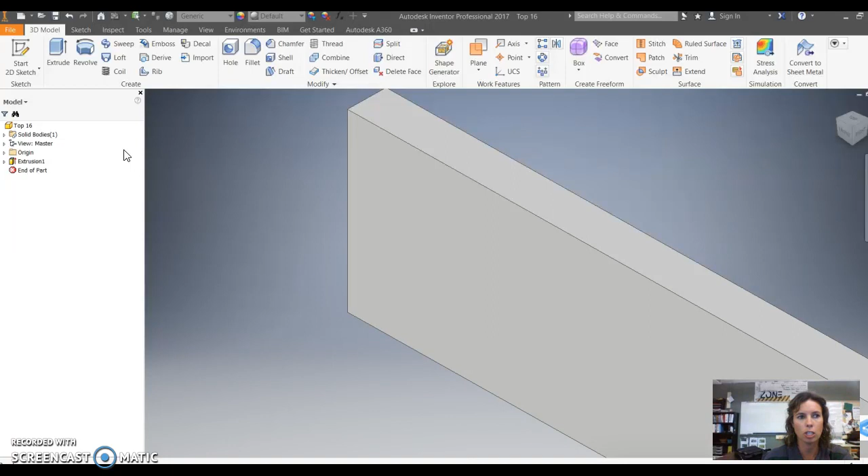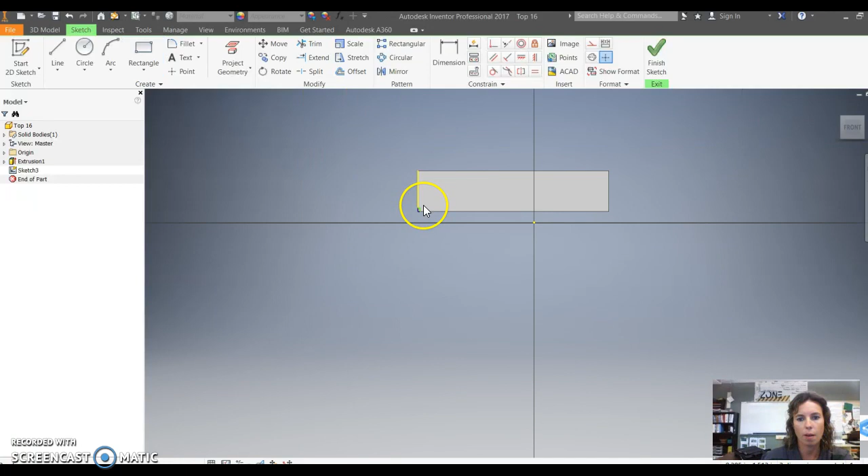I'm going to do an example of how you would make your 16-inch lap joint. First thing we need to do on the face is make a new sketch, and we're going to draw a rectangle. We want to start that rectangle at the corner, and drag it out. Then I'm ready to dimension that rectangle. The dimensions are going to be 3/4 of an inch by 1 3/4 inches. That's my first rectangle, and this is the area I'm actually going to cut out.

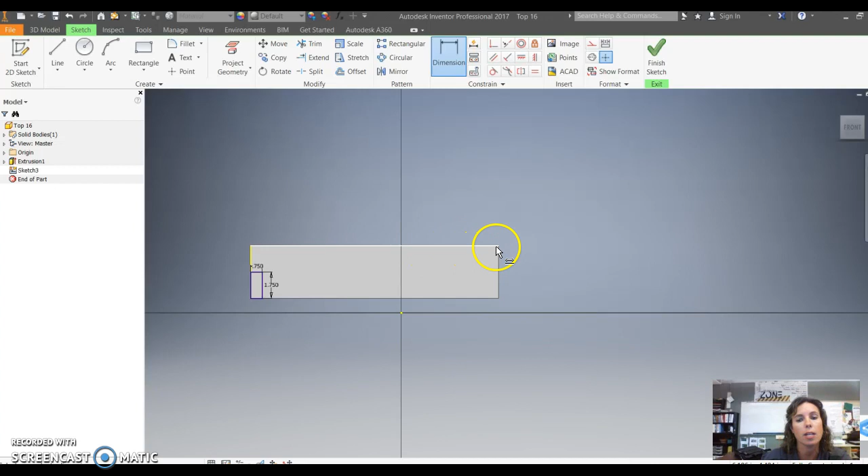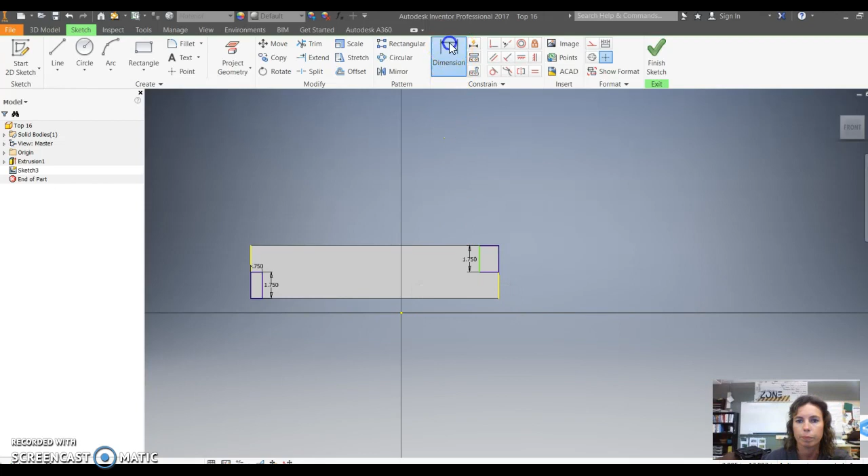So I'm going to extrude this out the whole way. I need to do that on the other side as well, and it's important that it's at the opposite corner. So on the left I was at the bottom, so on the right it needs to be at the top. Again, I'll start with my rectangle, making sure I have the green dot saying I'm on the corner, and I'm ready to dimension. Again, it's going to be 1 3/4 inches by 3/4 inches. Now I'm ready to extrude.

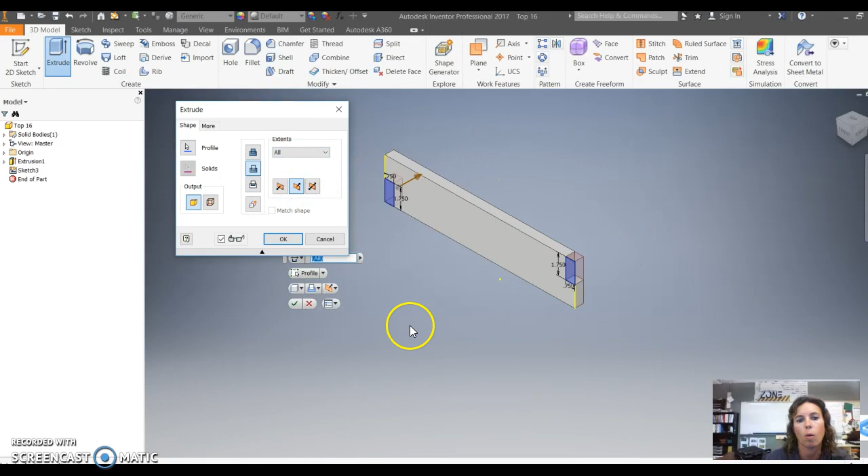I'm going to come over and use my extrude tool. I'm going to select my profiles, say that I'm going to cut them, and for my distance I'll say all, because I want to cut it the whole way out. Hit OK, and here's my part.

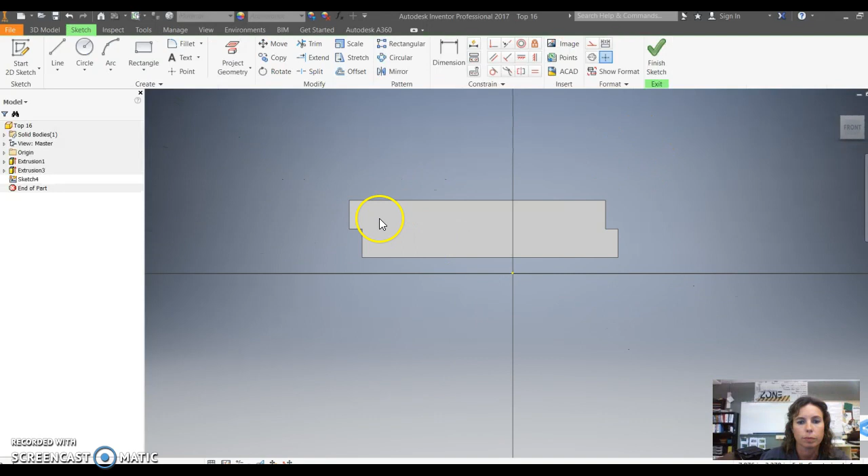Now, when it comes to our pre-drill holes on our lap joints, we only need 2 pre-drill holes per lap joint. So both the 16s and the 13.5s are going to be lap joints. We're going to do a new sketch, make our circle, and dimension our circle. It's still going to be 1/16 of an inch, that has not changed. Move that back into place.

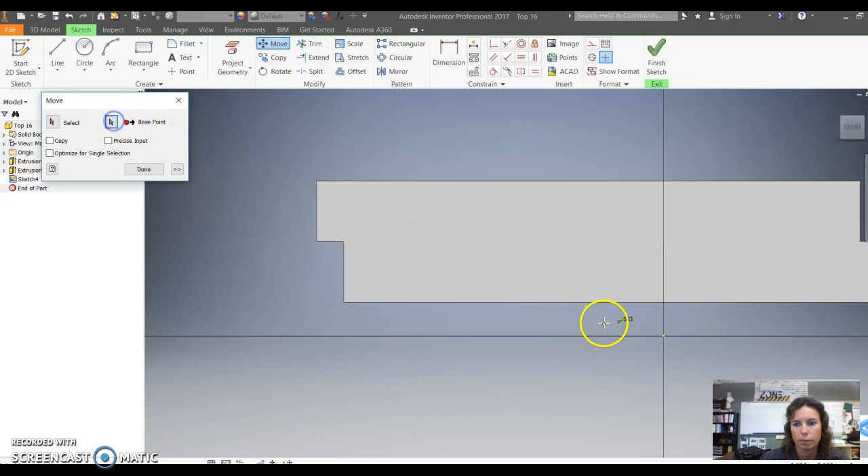Inventor is not very good with the move tool sometimes. What am I doing wrong? I think I finally got it selected. Yes, I needed it to turn blue. When it was blue, it was selected. So I know that's going to go approximately right there.

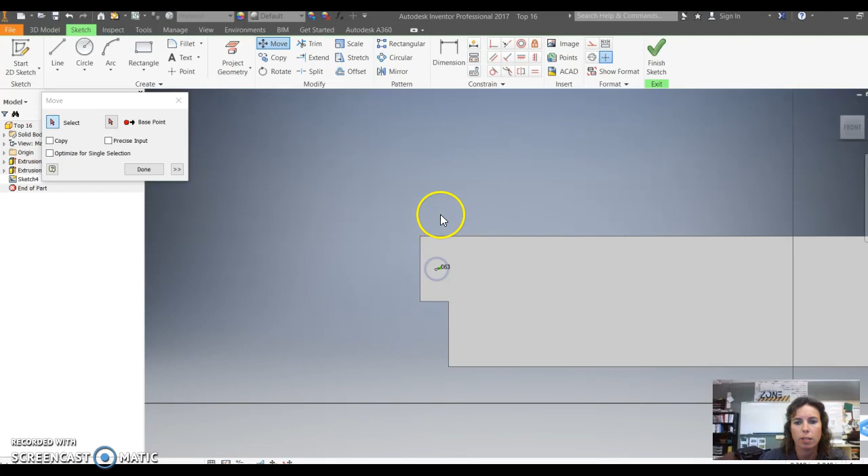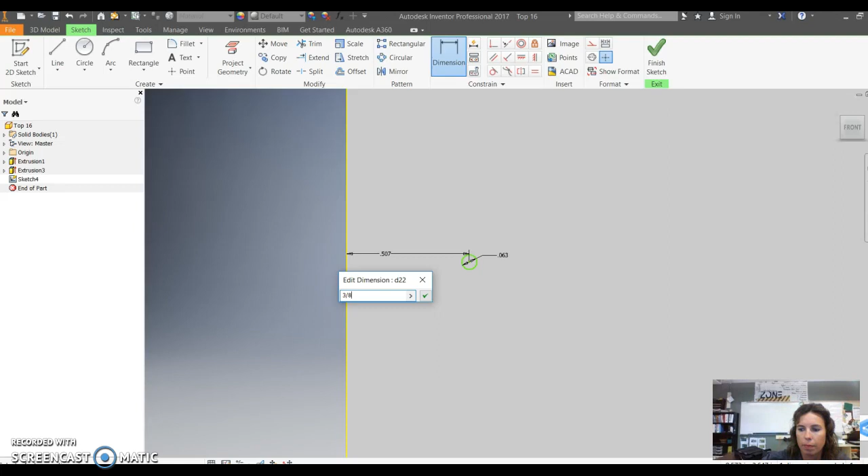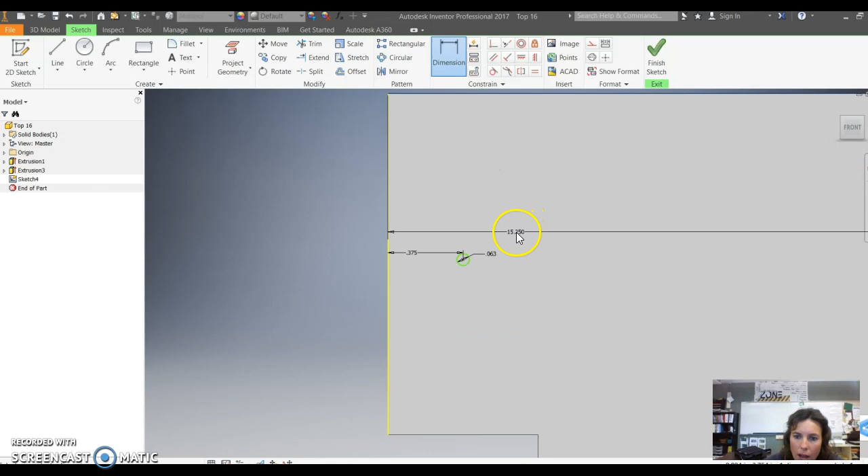But again, I can't guess, I do have to dimension it. From the vertical edge to our center point is always going to be 3/8 of an inch because we're working with 3/4 inch lumber. And in my vertical direction -- I may have said vertical here, this is horizontal -- in my vertical direction, in this case, it's going to be 1/2 of 1 3/4 inches. This is 1 3/4 inches, so 1/2 of 1 3/4 inches is 7/8. So from my top line to my center point, I want this to be 7/8.

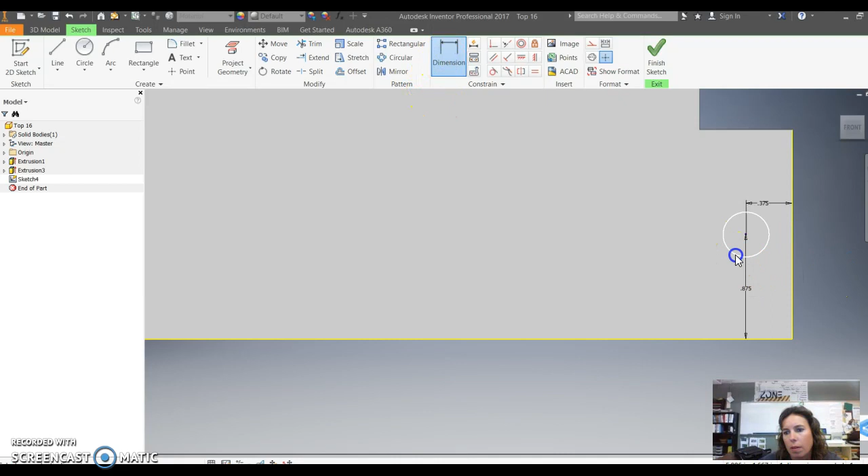And then we need to repeat that application in this corner. I'm going to try something -- I'm going to go ahead and do my location dimensions first. This is 3/8. Before I do my size, I think that will help me with the moving. I think I can avoid having to move because the center point's always going to be the same.

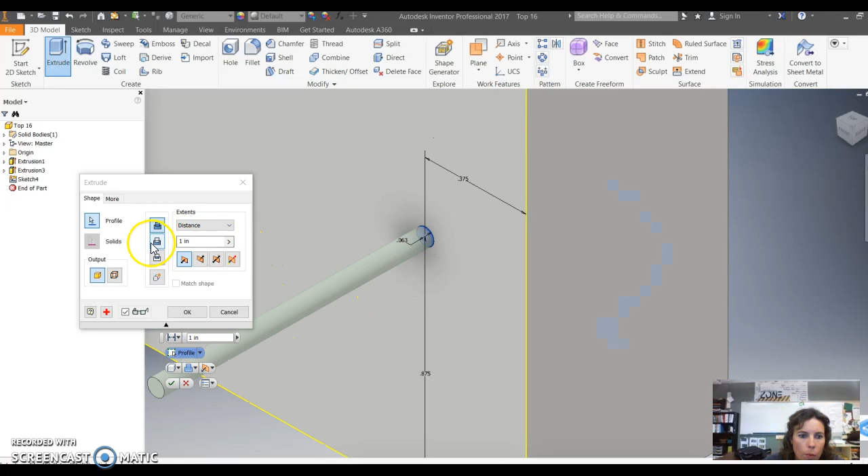I think that worked. So now I'm ready to extrude those circles, and I will have my pre-drill holes. It is important that you select both of them. We're going to subtract all and hit OK.

One really important thing I forgot to say at the beginning of this video: because I'm actually manipulating my top 16, it's really important that you do a file save as. If you just did a file save, you saved over your project. I'll put a note in the video so that's made available to you. This one is our lap 16, so we're going to go ahead and save that.

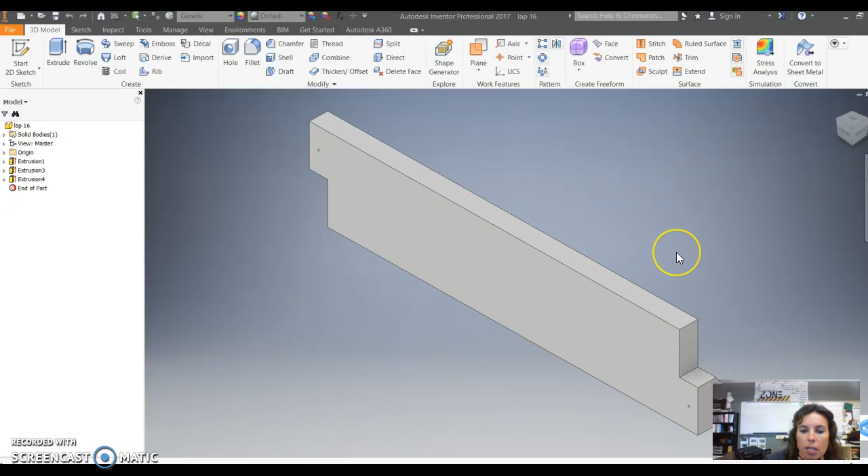I'm going to do a separate video where I show you how to take your lap 16 and change it to your lap 13.5, so you don't have to redo the cutouts or redo your pre-drill holes. That's all for right now. Take care, have fun.